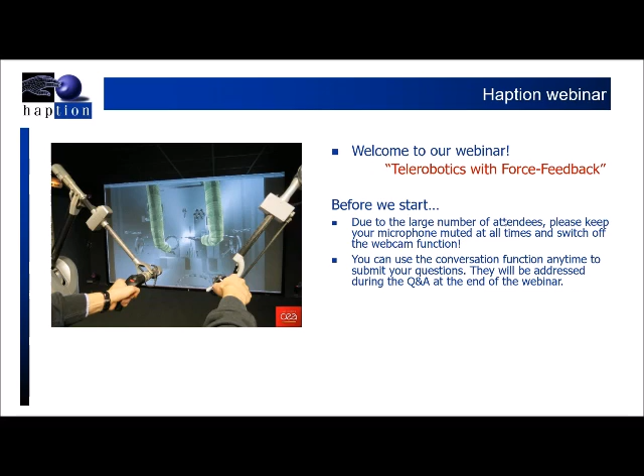So next, the seminar will start with a short introduction about the company, some references and products. After that I will pass the word to Jerome, who will continue on telerobotics and use cases, and then we'll come back for the Q&A.

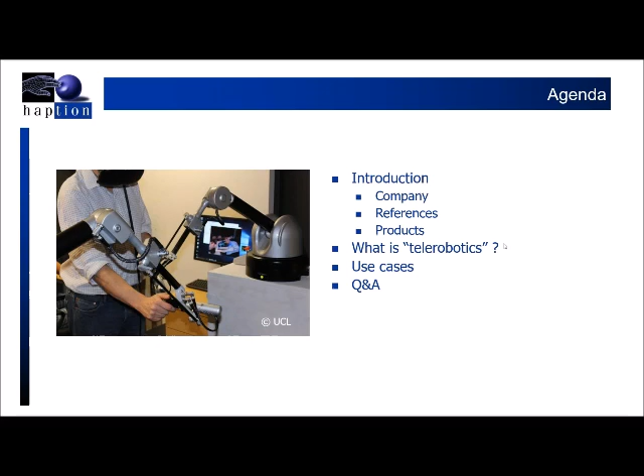So Haption, we are a French company, born in 2001. We come from CEA, the French Nuclear Agency's robotic lab. We are located in the west side of France, and we have an office in Germany, but we have many partners everywhere in the world, so we deploy systems everywhere - Asia, US, North America, South America - depending on our partners.

We are key partners of Dassault Systèmes and Siemens PLM. We won't talk too much about this part today, it's more for simulation and how we use haptics to do force feedback collision detection in the virtual environment. We will talk more about telerobotics.

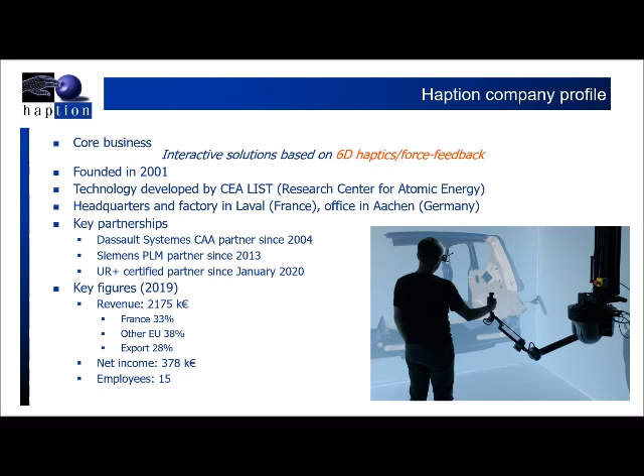Today we are also partners of UR, so UR Plus partners. These are the numbers from last year - we do more than 2 million euros, mainly 30% from France, 30% from other countries in Europe, and 30% nearly worldwide. So we are really a small company, around 15 people, but really focused on development of hardware and integration of software.

So this is the list of products, I concentrated everything on one slide. Coming from the desktop is the wrist size and low force. As you go to the right part, you see we extend the workspace - the Virtuose 6D TAO is the size of your arm, and the Scale 1 can extend the workspace to a large room.

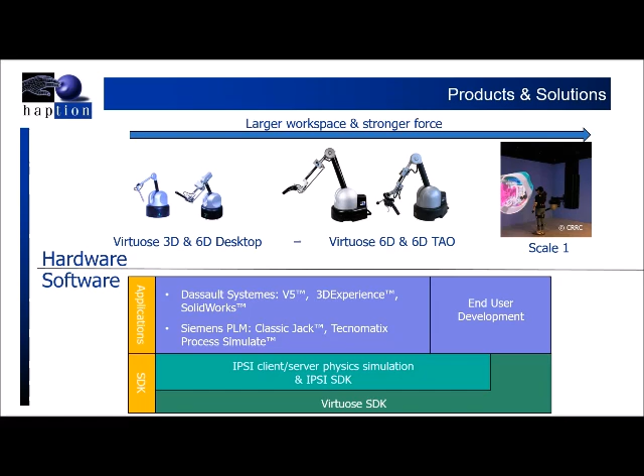But first, I will go through an introduction of what we understand as telerobotics with force feedback, and give you an overview of the use cases we are looking at.

So what is telerobotics? There's a good definition on Wikipedia which says it's the control of semi-autonomous robots from a distance, a combination of teleoperation and telepresence. The scientific foundation comes from a very famous paper by Thomas Sheridan in the journal in '88. So it's not a new concept.

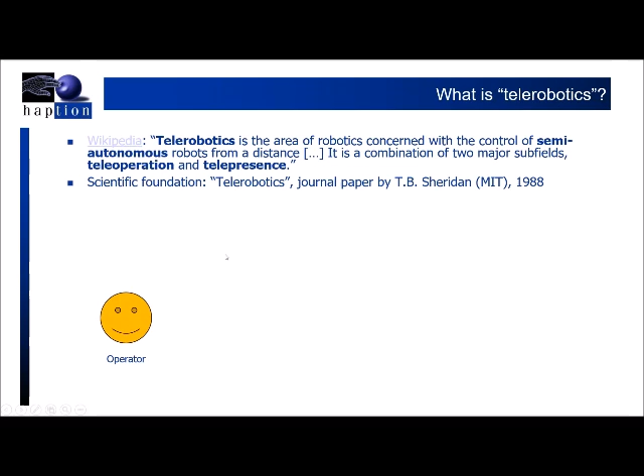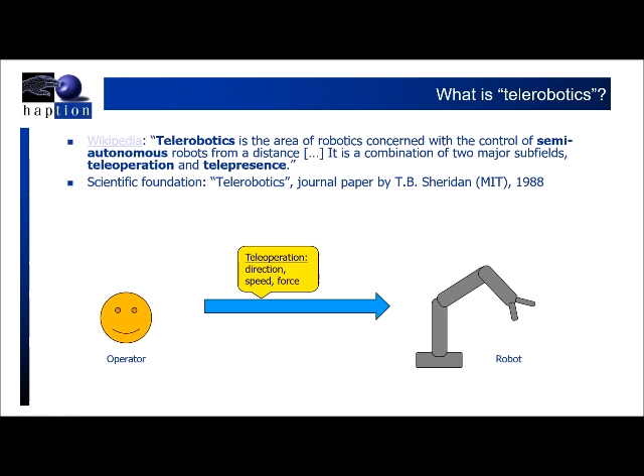Basically what it means is that you have an operator and a robot. The operator controls the robot, meaning the operator gives a direction, speed, and a force, or some combination of those - that's the teleoperation side. And the robot feeds back information to the operator, again direction of movement, speed, force, or a combination.

The added thing is that the robot itself also has a form of semi-autonomy. One possible form of autonomy is the use of virtual fixtures, which are a way to simplify the work of the operator by freezing some degrees of freedom.

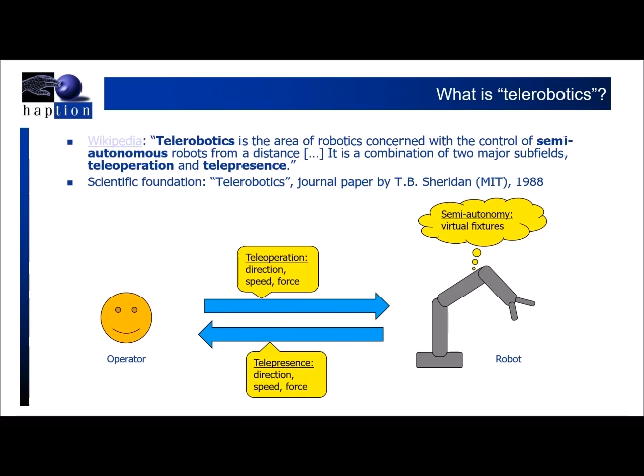So that's the concept of telerobotics. And now what about force feedback? So there are two main contributions of force feedback in the field of telerobotics.

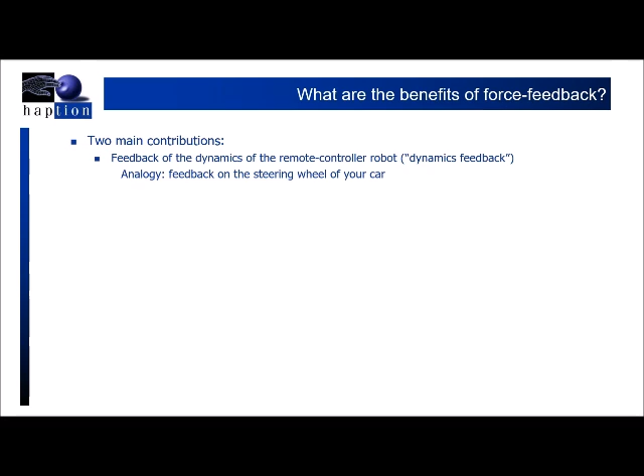There's the first, I call dynamics feedback, which is feeding back to the operator the behavior of the robot. If you want an analogy, it's the feedback on your steering wheel when you drive your car. You know that in case you lose that feedback because the road is slippy, then you basically mostly lose control unless you have specially trained for that.

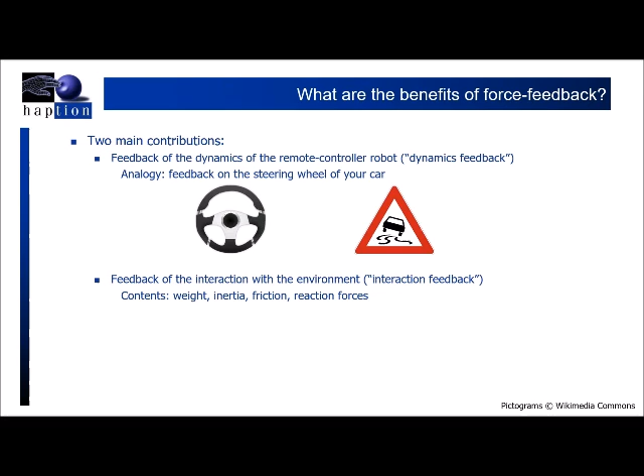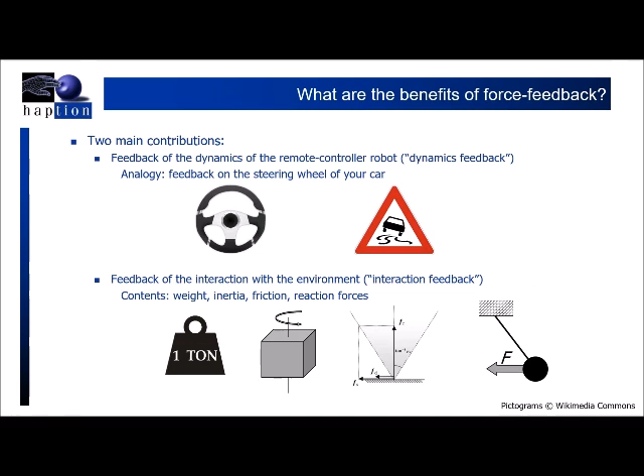So that's really the dynamic feedback, which is very important and does not really depend on sensors on the robot. And then there's a second contribution, which I call interaction feedback, which is the feedback from sensors on the robot, feeding back the weight, inertia, the friction when you have contact, the reaction forces. So all those aspects which can be measured in the remote environment by the slave robot and fed back to the operator. So those are the two main contributions of force feedback, and we'll see that they don't have exactly the same requirements, constraints, and the same role.

So what are the main challenges when you develop a telerobotic system? First, there are robotic functionalities. So you need Cartesian space master slave control because most of the time your slave robot and your master robot don't have the same kinematics. So mapping the joints of one to the other is problematic, all the more so as they often don't have the same numbers of joints. So the easiest way to solve that is to use Cartesian space control, which means controlling a displacement in space, position, orientation.

Then you have the problem of controlling the redundant actuators in case your slave robot has more joints than the number of degrees of freedom you want to control in Cartesian space. That's called null space control. Then you have the compliance of the master and slave, the force compliance, which is critical for force feedback. If your slave robot is not compliant, not force compliant, then you will need force sensors measuring the effect on the environment or the weight of objects if you want to feed back the information to the operator. You always have to cope with scaling of movement, scaling of forces, and then the virtual features I already mentioned.

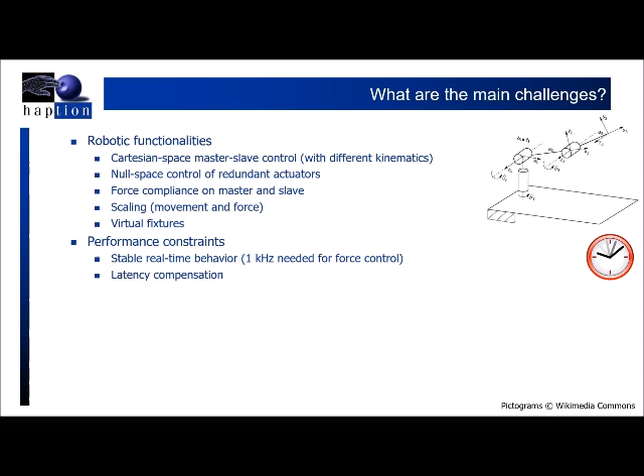So those are the pure robotic functionalities, but it's not enough. You also have to face performance constraints. First of all, because you're dealing with robots, you have to have a very stable real-time behavior of your control system. That's a given. The additional constraint is that for force control, you need something like 1 kilohertz update rate. You want to have something stable. And then you have the latency problem. If you are transmitting data over a network, then you are putting latency in the control loop, and you have to solve that.

Then you have safety constraints, and that's when you want to go to the market with a telerobotic solution. Safety for the operator, so you can do that by reducing forces and speeds of the master robot. You can monitor the activities so that you will do basically emergency stop if the software sees that something wrong is happening. And on the remote side as well, you have to control the forces and speed of the slave robot so that it doesn't wreak havoc in the environment.

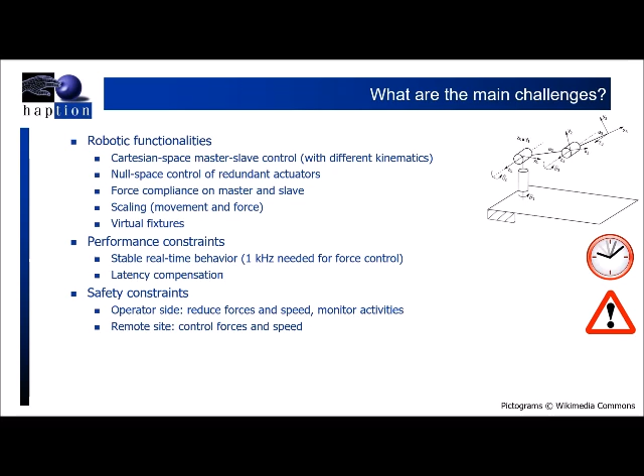And finally, something you also have to face when you want to go to the market, you have standards to consider. So for example, there's a new standard, 15066, robots and robotic device collaborative robots, which is now in force, and you have to see how you can adapt or apply that standard. And maybe you should also look at something like the 13482 about safety requirements for personal care robots, as probably the future standards will incorporate some of those requirements.

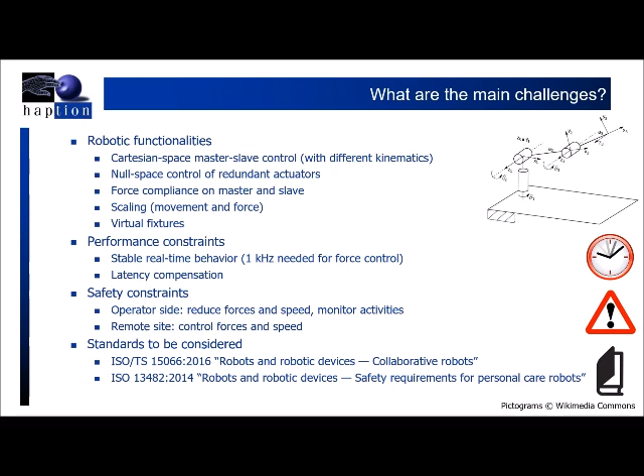So a lot of things to consider when you're developing a telerobotic system. So what's now the vision of Haption with respect to that? And that's a chart which is a bit complicated. This is a view of our coming product, which is called Telerobotics Extender, or the short name T-Rex.

This is the view with collaborative robots. So collaborative robots are very nice if you talk about telerobotics with force feedback, because they already incorporate force sensors and in some way a kind of force compliance. So we're looking here, for example, at the E series of the Universal Robots, the 5, 10, 16 now. We're looking at the KUKA iiwa, which was the first on the market as a collaborative robot with joint torque sensors, and now a more recent entry, the Kinova Gen 3, also redundant, like the KUKA iiwa.

The way we see it, and after compiling lots of requirements from different customers, is we want to not only have master-slave control over a network, internet if the ping is good enough, 5G is coming. We will have use cases where we need a radio frequency transmission, maybe Wi-Fi. So a variety of transmission solutions with different latencies, different loss rates.

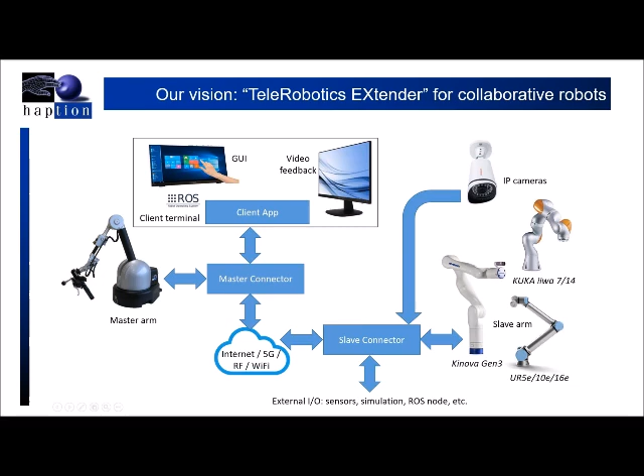So that's the whole concept for collaborative robot, as I explained, providing dynamics feedback but also interaction feedback, meaning a real interaction with the environment. But this is only for collaborative robots, and there are lots of use cases around which don't fit those collaborative robots on the market today.

So we also plan to have an extension for industrial robots. We already played around with the KUKA KRC, and with the Kawasaki robotic solution, and a number of other suppliers. We're already confident that we can handle those two, for example, but only with dynamics feedback, meaning that they do provide a kind of high-speed interface, but it's not really 1 kilohertz, so we are not going to have a dependable systematic interaction feedback with force measurement.

It will be possible case by case, some with the measurement of the motor currents, some with additional force sensors, but it will always be a specific development. So we also plan in the future to talk with Doosan, ABB, Comau, whatever, depending on the use cases and the requirements of the customers.

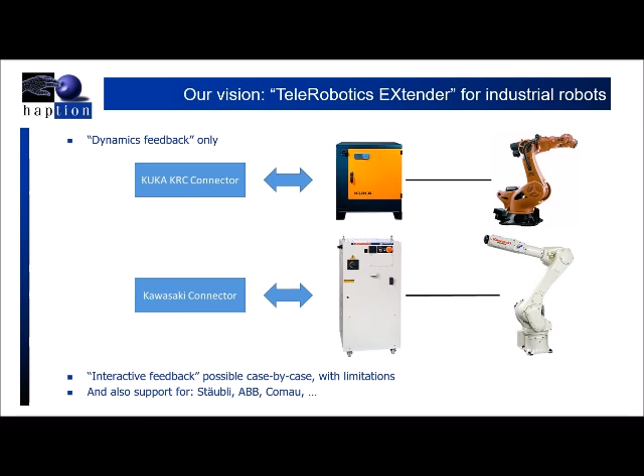And then there's a second extension, which is the possibility to have a custom designed slave robot. This is a case we often see in the nuclear industry, having a legacy telemanipulator which needs to be motorized and used as a slave with our Virtuose devices as master.

For that, we are also developing a connector for the Yaskawa series of products, the Sigma 7 motor drives and the SGM7 servo motors, which have very strong torques and good control flexibility with an EtherCAT bus, so we can basically put the Sigma 7 motor drives on the bus, as many as needed for the slave robot.

As long as you choose the motors from the Yaskawa series, you can drive your own robot. You just need to define your kinematics, and that's it. You can tune your control loop directly with the Yaskawa software, which is very efficient for that, and drive your robot and have your master-slave control system with our Telerobotics extender.

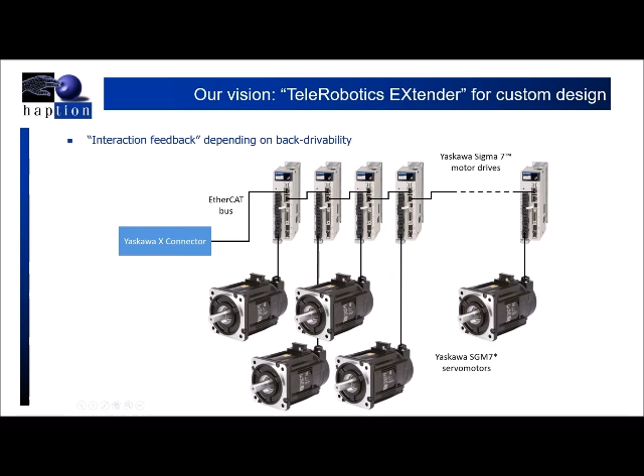So that's our vision. That's coming soon. We will have a first version of T-Rex coming up end of June. But now let's look at use cases.

First, I will show you three successful use cases already around in the field of nuclear energy and healthcare, and then talk a bit about future use cases which we see coming, especially with the advent of the new collaborative robots and the new high-speed interfaces with industrial robots.

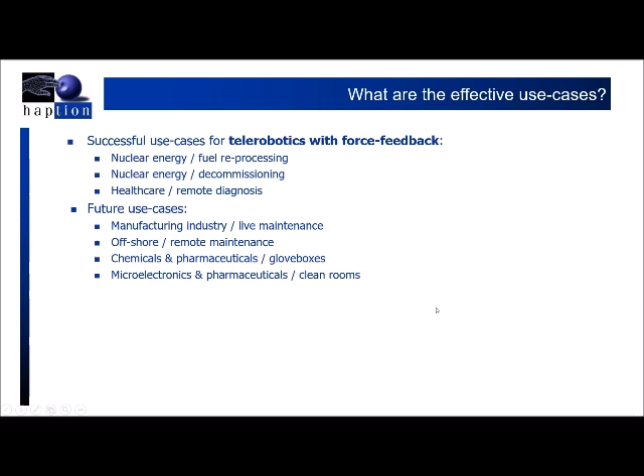In the case of fuel processing or fuel reprocessing in the nuclear industry, robots have been used for more than 60 years for handling radioactive material. Most of them were initially mechanical telemanipulators, which are very good at what they do, but are very expensive to maintain and have their mechanical limitations. So the benefits of replacing or enhancing those with a force feedback master-slave control is better ergonomics and lower maintenance costs.

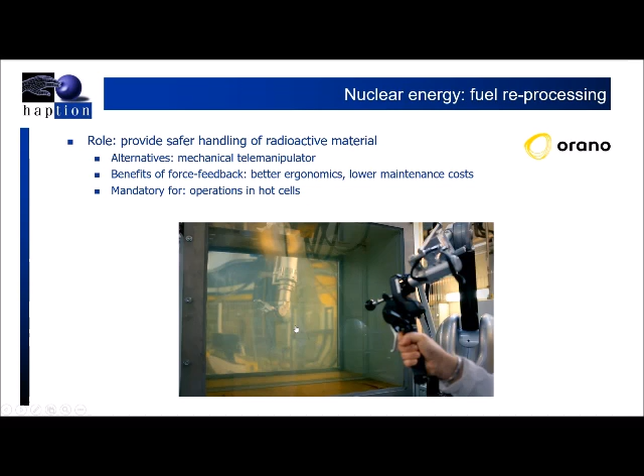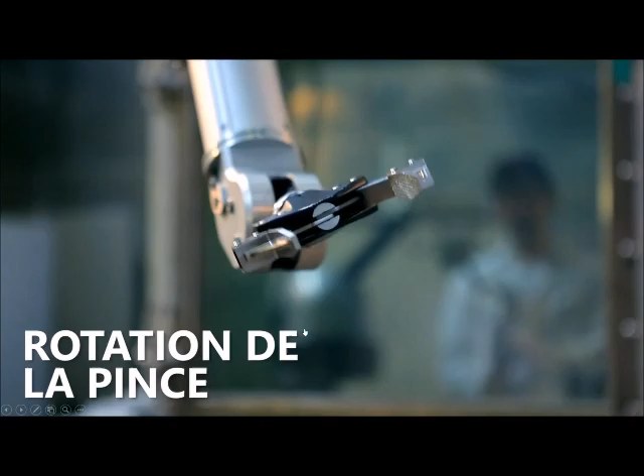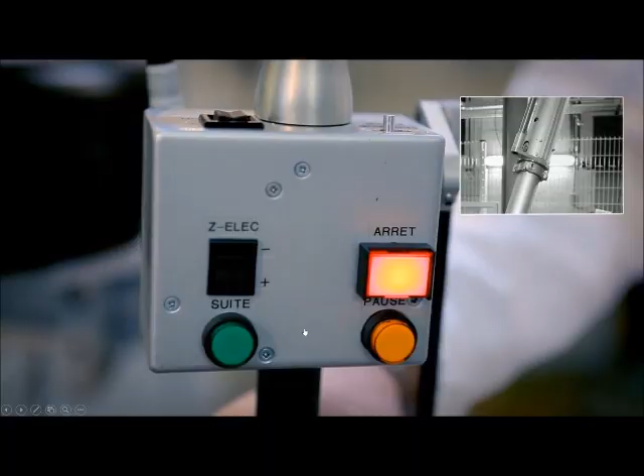So of course you have a trigger to control the gripper. You can lock the gripper. You can rotate it without moving your hand, and then you have additional functions on a small box at the forearm to control different functions. And here is an example of redundancy on the elongation of the third joint.

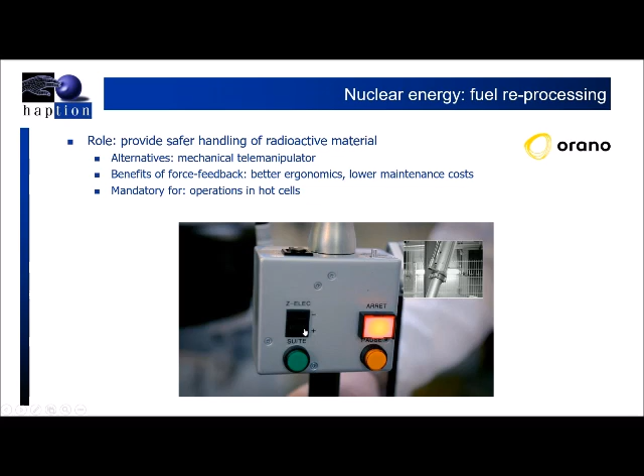So that was about fuel reprocessing. Another example is for decommissioning. So here again, it's about handling radioactive material, or cleaning up or cutting the facility, basically to extract the parts which are contaminated and then put them in a bin.

The benefits again of force feedback is to reduce the contamination hazard. That's mostly for telerobotics in itself, but also having force feedback specifically will enhance the safety of the operations, because you control really what you're doing, how the robot moves.

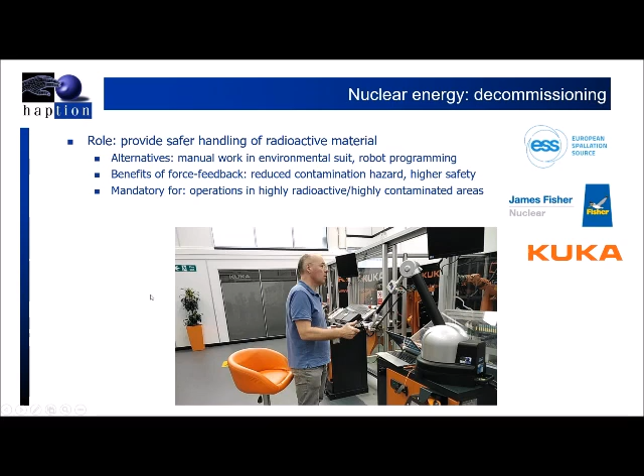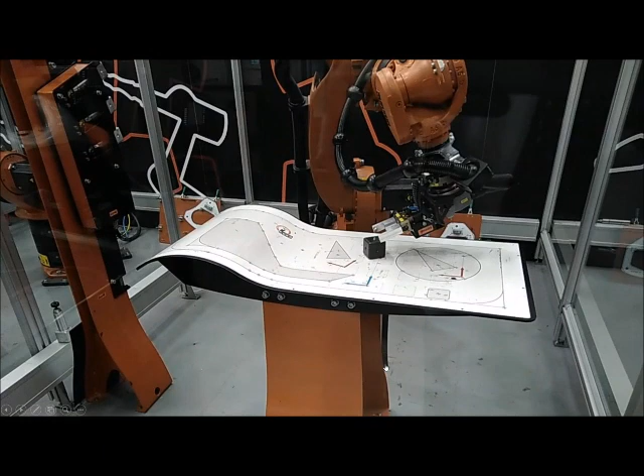So here an example which was shot. That's myself moving. I'm not an expert nuclear teleoperator, just showing the capabilities we can reach with this KUKA industrial robot.

So compared to fuel processing, where the intensity of radioactivity is extreme, in case of decommissioning there are some areas where potentially you could send human operators, where the radiation hazard is not too high. So you can also implement standard industrial robots, but you need a way to control them remotely, and that's an example with a simple KRC controller.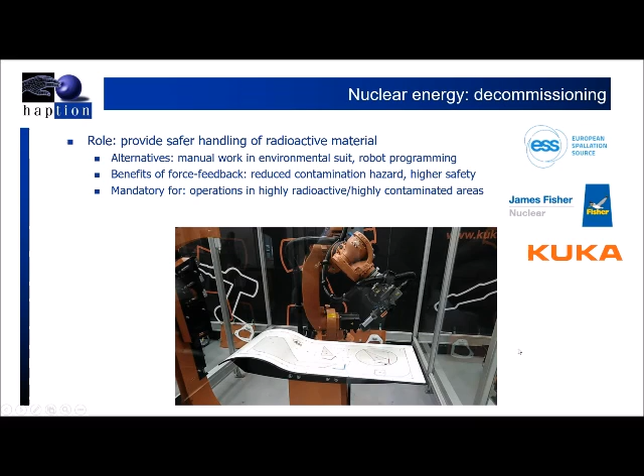Another application or use case is in healthcare to provide remote services. It happens that with the running pandemic this is a very hot subject right now, but it was not invented this year. A number of our customers have been developing systems for remote diagnosis, for example echography.

The alternative, and that's what being done today, is that the physician drives to the patient, or the patient drives to the physician, to the hospital, or whatever.

And here, if you replace that with a telerobotic solution, then the force feedback gives you a higher safety and confidence for the patient and for the physician, because they are really controlling the force applied on the probe. And also you have better precision of movement, because the force feedback also reduces your motion speed, and you can scale up and down your motion.

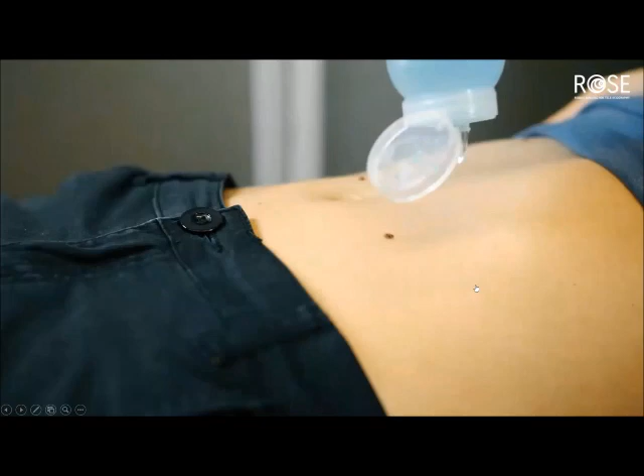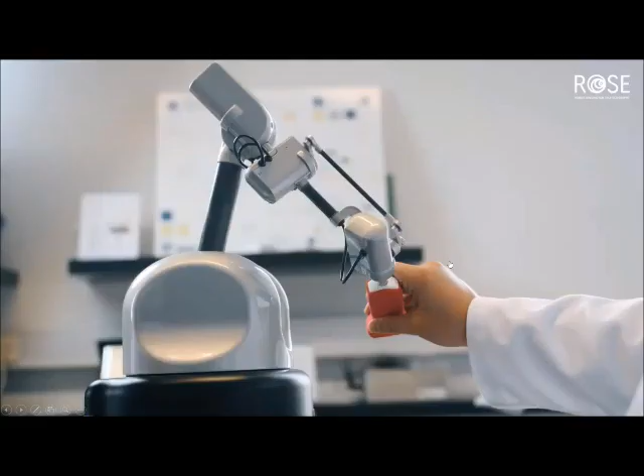So that's specifically developed for areas of low density of medical facilities. Here an example of the ROSE project in Portugal, where they implemented one of our Virtuose devices as a slave. As you can see, this is a Virtuose 6D device, and they're using our Virtuose 6D Desktop device as a master. And so you saw really operation on a real patient. The project is running, and they are looking for market introduction coming soon.

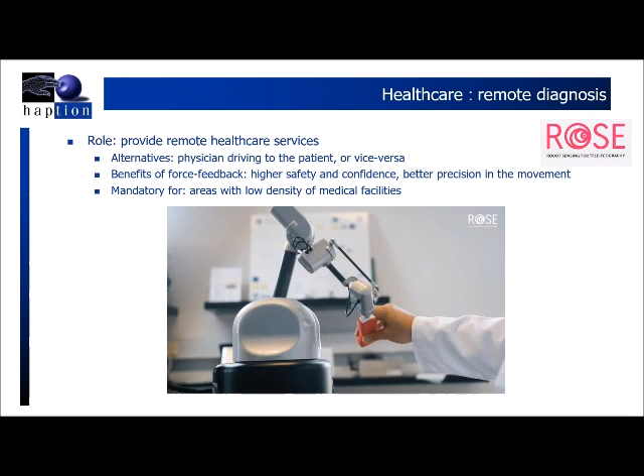Now I'm moving to the future use cases. Some things which we've been discussing with customers as prospects, but we have not hard data on.

So first example, in the manufacturing industry, the problem of live maintenance. It means performing small maintenance operations without stopping the production. And when you've seen big automotive factories, you see all those robots in robotic cells. The cells are closed, no human is allowed inside.

And so if you need to do maintenance there, you have to stop the production line. Usually, basically, you wait until there's a holiday period, or when the factory line is closed anyway, to do all the maintenance stuff then. Or you could use an autonomous robot, but that's a problem which is technically not solved.

So the benefits of telerobotics with force feedback is to be able to do the maintenance remotely without stopping the production. Remotely is, in that case, in very short distance, so you don't have a problem with latency. And the benefits of force feedback is that you have a better control of your process, of the forces you apply, of your motion, and also you can be assisted with virtual fixtures.

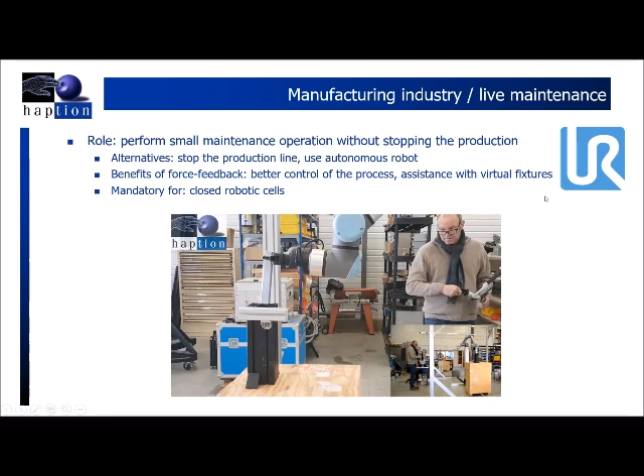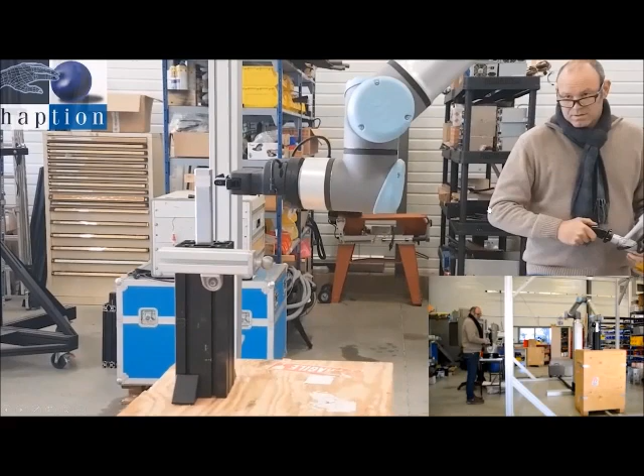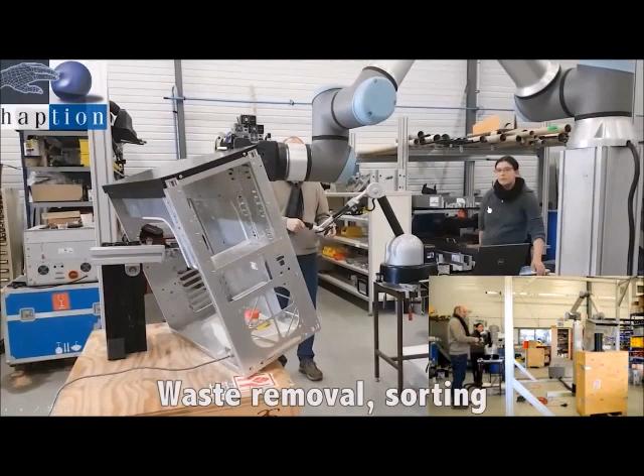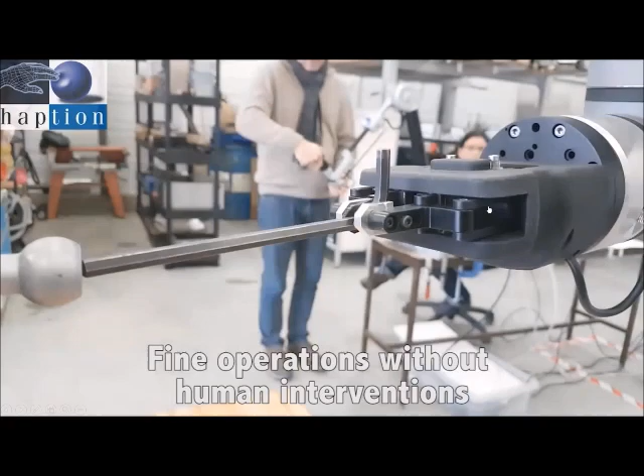So here is not a real use case, it's just a demonstration in our factory in France about controlling a UR, Universal Robot. This is a UR10e with a force sensor, doing some different stuff which you obviously could not program, because the environment is just not fixed enough for having set positions, and it's just a rough handling, which is just not programmable.

Another example is remote maintenance for the offshore industry, where you have delicate maintenance operations to be done on the offshore platform, which requires a specific expertise. So today you have no alternative but flying an expert to the platform, which might be difficult depending on weather, depending on the distance, whatever.

And so using telerobotics to do that, meaning that we will need personnel on the offshore platform to set up the robot, probably in the right place, but then the expert can control from the distance.

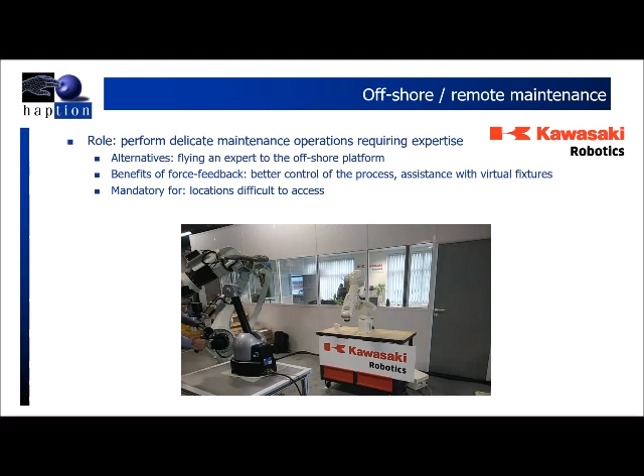And here an example, again not a real use case, but showing what we've done with Kawasaki Robotics about controlling a small robot, which could be easily used for such kind of remote maintenance on site.

Here, Pierre moving with our Virtuose 6D TAO device with the tray handle. So you see that we can have a very delicate motion, and here you see that we have a scaling of the motion. Pierre is doing a lot of clutching to recenter the master device so that he's always in the right position, the optimal position to control.

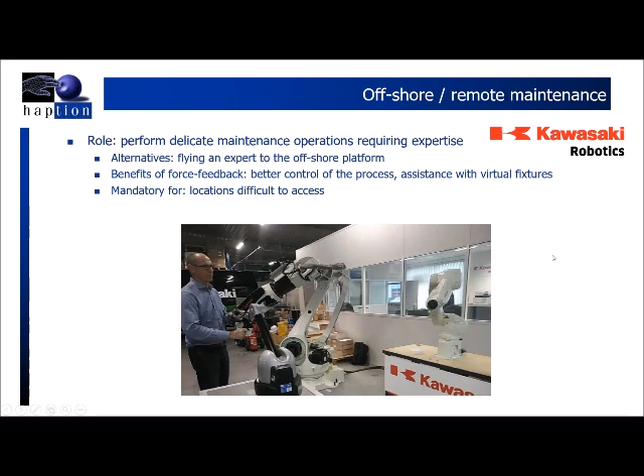Another use case we've been discussing is for chemicals and pharmaceuticals, the use of glove boxes. Glove boxes are widely used in lots of industries. Using robots in glove boxes would be a way to reduce the risk to human operators and also to optimize operations, because they would not always be limited to the entry ports which have been placed for humans.

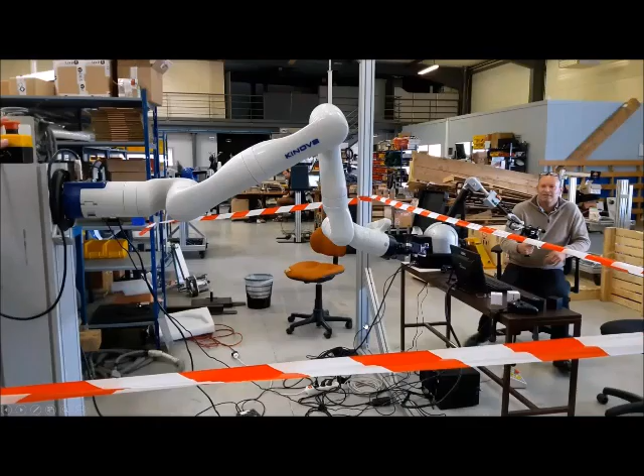Here's an example of using a Kinova Gen 3 robot in a horizontal position so that it could be inserted through an existing port of the glove box, again with the same Virtuose TAO with a tray handle inside our factory.

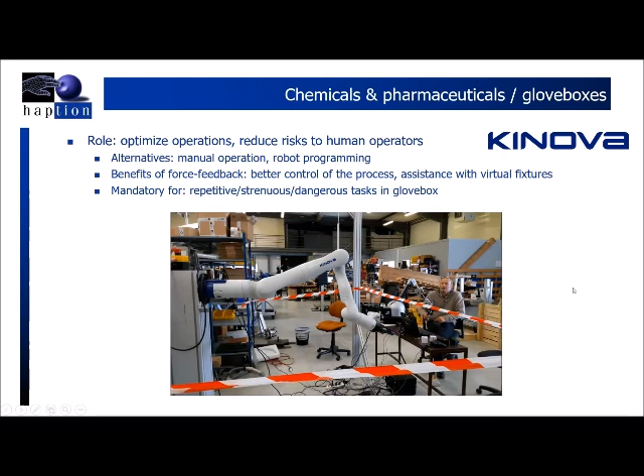One final use case we've been studying is clean rooms for microelectronics and also for the pharmaceuticals industry. Clean rooms are widely used in those industries, and again, the process for humans to enter and exit is complex, takes time, and also the risk of contamination is high.

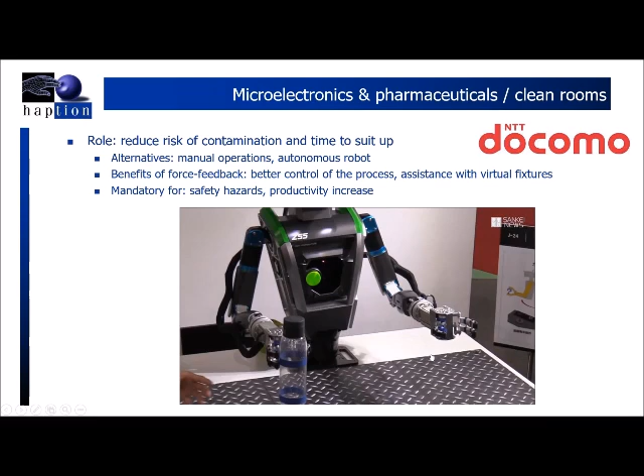So having a robot replace a human in an environment which was prepared for humans, typically a humanoid robot would be suitable for that. That could help have a better control of the process, and also increase productivity, because the robot doesn't have to leave the clean room every 2 hours for a break, and also reduce the safety hazards.

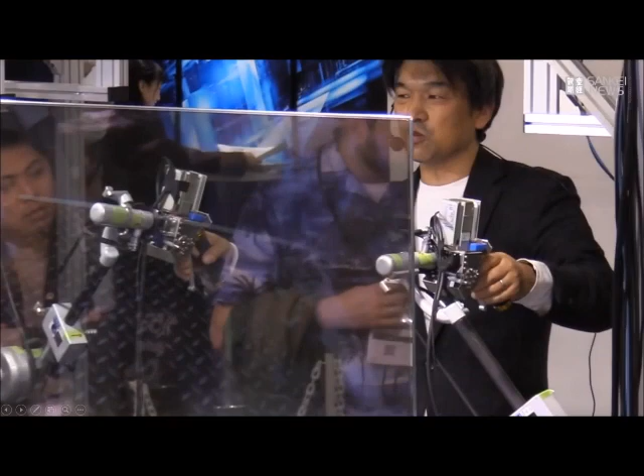So that's an example coming from one of our customers, NTT Docomo in Japan. They were showing 2 of our devices controlling 2 arms of a humanoid torso at a trade show in Japan.

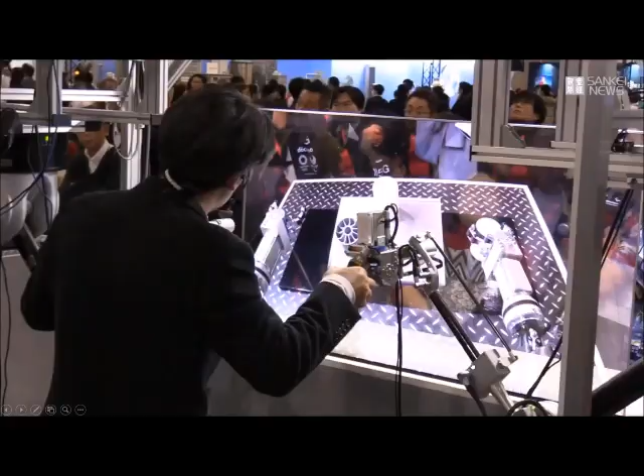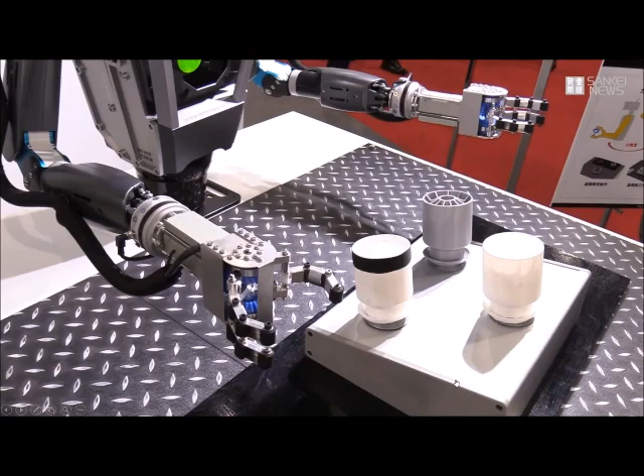I switched off the talk because it's in Japanese, but here you see the person having a very nice display, semi-transparent, and the robot acting on the other side with force feedback, with very complex tools. So it looks like a prototype, of course, but this is coming up.

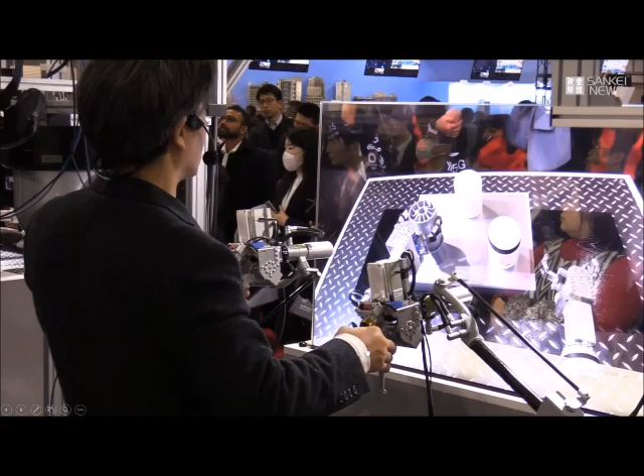And here you see the importance of having this dynamic feedback so that you really control the fine motion. So that is for the use cases.

The key takeaways I want to point out are: Telerobotics, I told you, is an old concept, going back to 1980, the first papers of Thomas Sheridan. Yet now we see it undergoing a rebirth, thanks to many emerging use cases, and also thanks to the availability of those nice collaborative robots with force sensors and high-speed interfaces.

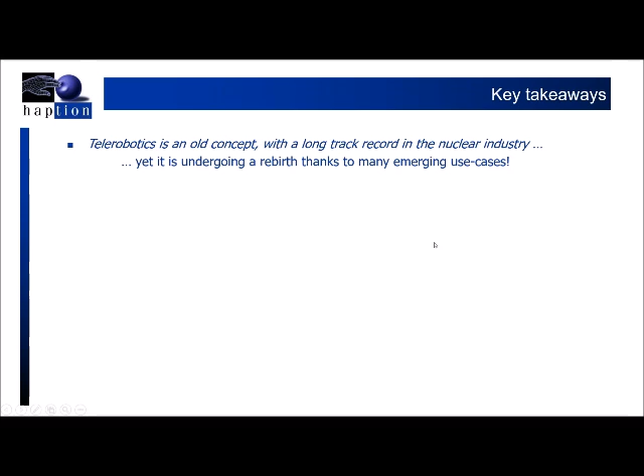The force feedback itself plays a key role in Telerobotics because it helps you better control. That's what I call the dynamics feedback. It also helps you sense the action of the robot on the environment, and so reduce its potential negative aspect. That's what I call the interaction feedback.

Both are important, but sometimes even if you have no way to measure the force on the environment, even dynamics feedback is already a very good added value.

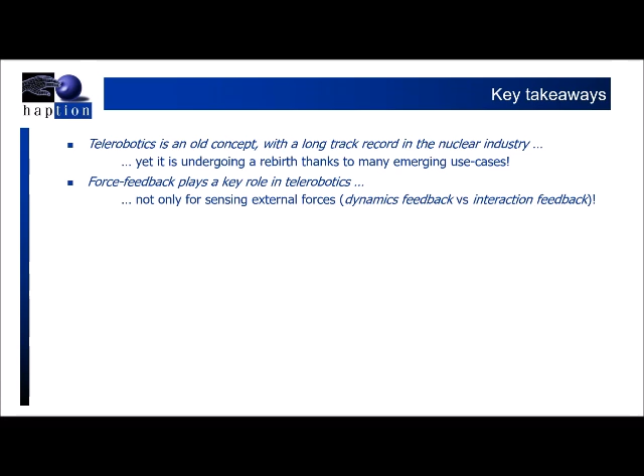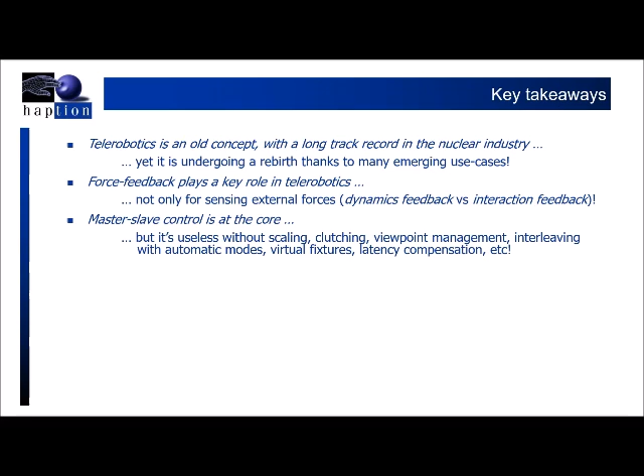And finally, master-slave control is at the core. That's really the robotics aspect. But then it's useless if you don't have all those other functionalities like scaling, clutching, viewpoint management, interleaving with automatic modes, so switching back and forth between manual and automatic. If you don't have virtual fixtures, complexity, latency, etc.

So basically, it's all about leveraging your manual skills with robotics, and that's what I wanted to tell you about today.